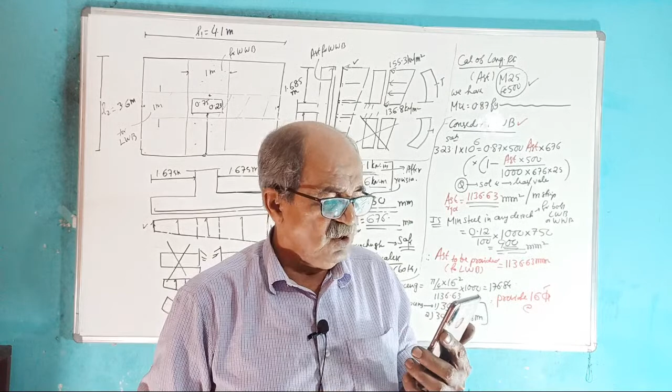Video is okay, we shall continue. See, these decorations all I am not bothered about. The decoration part, people want systematically, but subject should be systematic, not other unnecessary things.

Again remember, I will tell you what happened. What happened is the usual problem. Because of some, see, usually I always check.

Today in the beginning, you wasted a lot of time for not giving values, I forgot it. Otherwise usually after 5 minutes I just go around and check the charging. Today I forgot to check the charging. Charging went off, that's all.

Charging problem. I told you always in the beginning of the class, just send one message to me. What? Charging sufficient, recording is not there. If it is a YouTube class, automatic recording, I don't have to record. In Zoom I told you, remind me charging and recording. In YouTube class, you just send one simple message.

See, someone told good evening there. Okay, good evening, thank you, good evening. But at least charging, at least charging, I will see it and check immediately. See, this is called unnecessary waste of time.

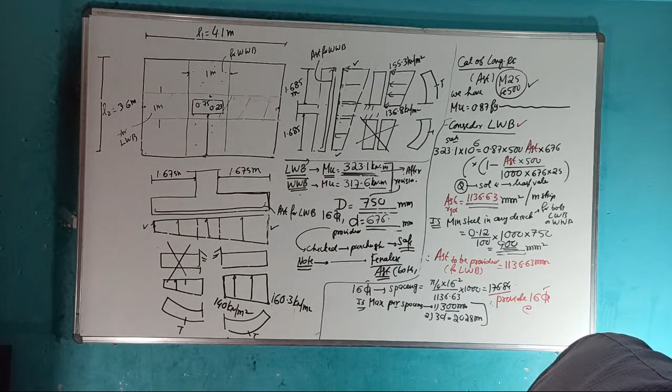See, now no disturbance. You will go for 16 torr at 175 center to center. Okay, that is 176.84, we will round up to 175.

This will complete. Therefore remember, later I will put this sketch once again, you don't write. So this AST for lengthwise bending is what? 16 torr at 175 millimeter center to center. Correct? Clear now? AST provided for lengthwise bending is 16 torr at 175.

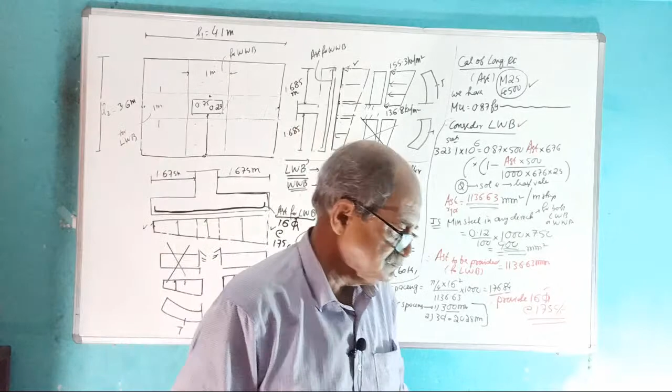We will change it later, no problem. Clear now? 16 torr at 175. Clear or not? That is AST for lengthwise bending.

Fast, okay. Now see, I am changing here. Consider widthwise bending, start once again from here. Bending moment is how much?

317.6. Okay, then equal to, same formula, tell me AST required first. Change AST, AST required first, instead of 323.1, now it is 317.6.

AST required, how much? AST required first. Solve the quadratic equation, get AST required. We should finish this question today.

Otherwise I thought I will tell one more information about the central band of rectangular footing. Okay, tomorrow I will tell it, tomorrow I will be very careful.

See, I prepared an extended class earlier only, but it takes at least 7-8 minutes for activating after charge is gone. This particular mobile takes at least 5-6 minutes, till that time it will not get on.

1116.96. So minimum remains same, so you have to provide 1116.96 spacing. How much spacing?

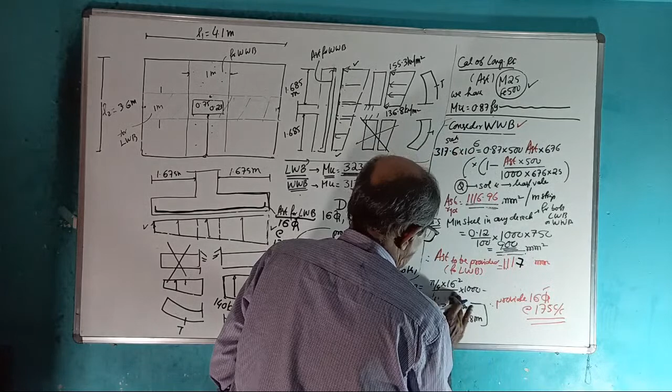Spacing for 1116.96, okay, 1117. Okay, why Chaukasi? Take 1117. Okay, now tell me, for 1117, spacing.

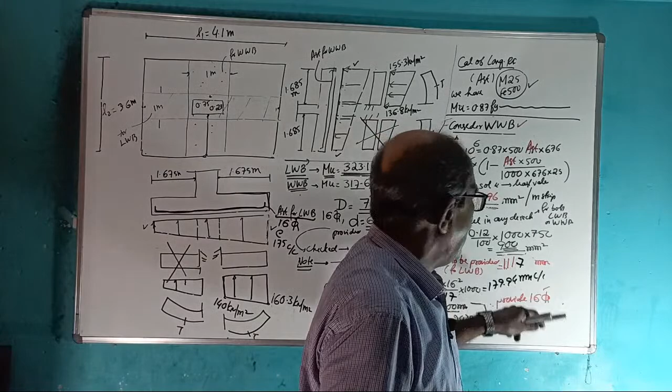See, when you calculate spacing from a strength point of view, someone will tell 179.94 is almost equal to 180. Or I will do one thing now - I will use the value. So I will make a small mistake here deliberately, so that I can show something.

179.94, you cannot make 180. You have to make what? You have to make 175. If you make 175, both will become same steel. Make a note - I do not want same steel for both. So, just for understanding purpose, I will make a deliberate mistake here.

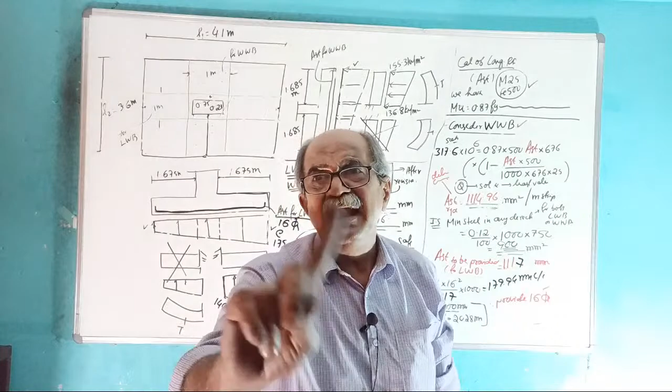Instead of 1116.96, I will make it 1114.96. You write here - deliberate calculation mistake in the class, purposefully made. Practically don't do it. So I will change it deliberately to 1114.96. And now tell the answer.

1114.96 spacing - this is just to see that the two steels are different. That's all. Now spacing, how much? This is a deliberate mistake, done just to see that two steels are different. 180.23. Therefore, now you can provide 16 torr at 180 mm center to center.

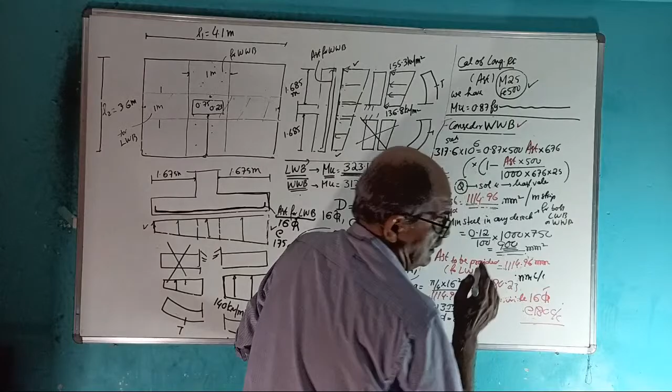Clear? Somebody will tell, someone will comment - you can't take less, I am taking deliberately. Don't take practically. Therefore, this steel equal to 16 torr at 180 center to center. Fully clear? Therefore remember, lengthwise bending steel is 16 torr at 175. Widthwise bending steel is 16 torr at 180.

And later I will change it. Fully clear? Full clear or not? Lengthwise bending, widthwise bending, both steel. Okay, now the most important part - I will rub everything now. Now we are going to the most important part. See, I will remove everything now.

This also I will remove. This also I will remove. See, now one heading you are writing. Now, check for shear. Remember, check for shear means which shear? One-way shear, not punching shear. One-way shear, or some people call it wide beam shear.

Wide beam shear, some people call it, or it is a shear which causes diagonal tension. See, which will create a tension crack this way - diagonal tension crack. Somebody will ask, sir, how does shear produce a diagonal tension crack?

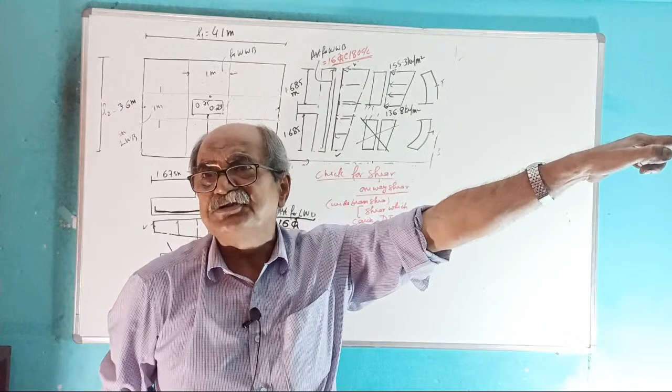Go back to strength of materials, it is discussed there. But for those in the RCC batch and also the ETABS batch, I told this earlier during beams, yes or no? Those in the RCC batch and also in the ETABS batch, long back in shear, I told this diagonal tension concept - tell me yes or no? Those who are in the respective batches, I told it there. General public, if you are viewing only from YouTube, just believe me, that's all. I cannot, for your sake, leave the subject and go into complementary shear.

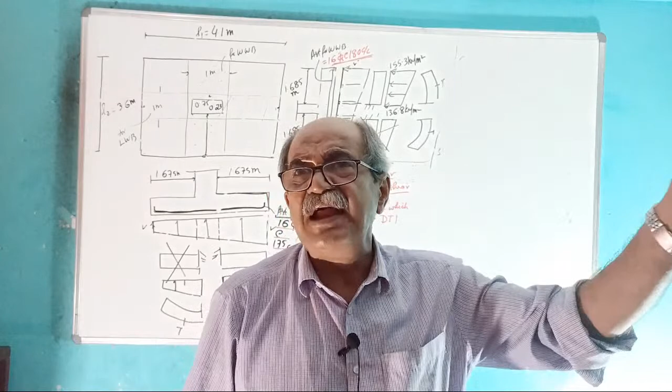Okay, start. Now remember, you can call this simple language our usual shear. Some will ask, what is usual shear? I will tell them - it is between me and my students. Don't interfere. If you are my student, don't question me. That's all. Okay start, tell fast.

Critical section - remember, make a note. Section for this shear is to be considered at what distance from face of the column? First, critical section for this shear - crack will run at 45 degrees. That was punching shear. Punching shear critical section is at D/2 from face of column.

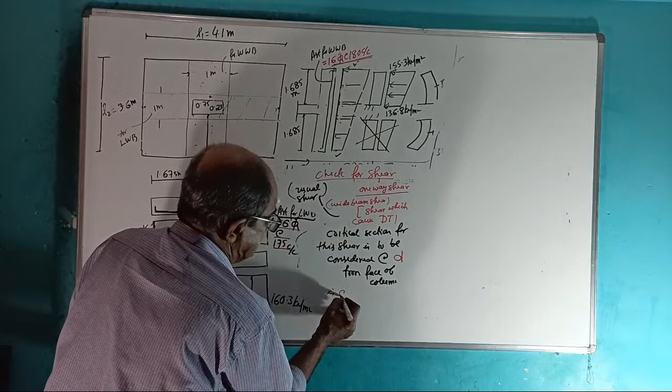For this shear, critical distance is at D, not D/2. That is at how much? D how much - oh, forgot. Tell me D value, I forgot the D value, everybody. Remember, D equal to how much? Forgot the answer - 676 millimeter.

676 millimeter, okay. That is at what distance? That is at 676 meter, 0.676 meter, from face of column. Remember, D is 676 millimeter. Why meter? Because when you are considering shearing force, we are referring to this diagram, and we want the dimension in meter.

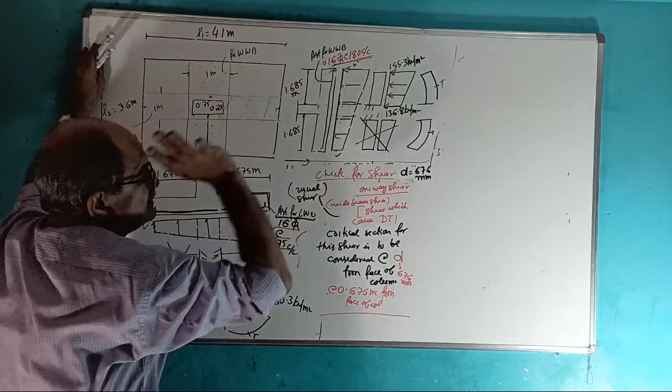Okay, now do one thing - start. Now, for all those who want to thoroughly understand, once again write this sketch. Once again write this sketch, once again write this sketch. See, good for health - write all these sketches once again. Then note, write all the sketches. Remember, once you get control, this sketch is already there, so you can use the same sketch and mark it with a dotted line. But this time, for thorough understanding, to make it completely independent, write all the sketches once again.

Then, first consider lengthwise bending. Okay, when you take lengthwise bending, what do you do? Mark critical section - see, mark critical section. Start. See here, from the face, this side - which side is critical? See, it will be somewhere here.

Now, 1.675 — I will push that side. Go that side. 1.675, I will push that side.

See, from here, this is the critical section for shear. From here to here is D, equal to 0.676 meter. Therefore, anybody can tell me what is this distance first.

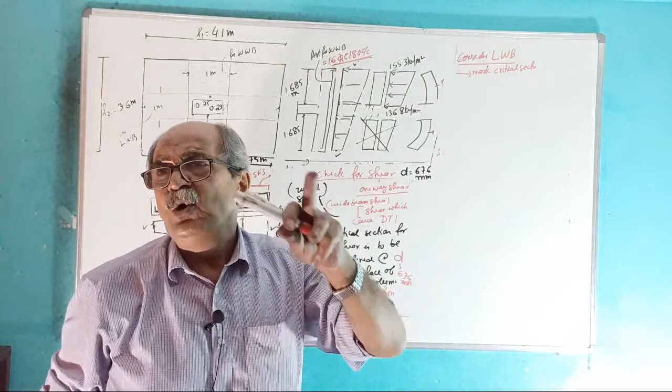This is 1.675. Tell me what is this distance. Why? For finding shearing force for a cantilever, I told you, you have to look at the free end side. Someone can tell me, I will look at the fixed end side instead. If you look at the fixed end side, you require a reaction which is only due to a 1 meter strip. Can you calculate that?

I don't know. Then keep quiet and look at the free end side. When I tell you something, follow my statements. Don't try to advise me something else. It is beyond your capacity to advise. Answer.

1.675 minus 0.676 equals 0.999. Thank you. 0.999 meter, almost 1 meter. No, let it be 0.999.

Now I want the shearing force here. Look at this side. Look at this side. This I repeatedly told you — cantilever. Either you believe me, if you have not come to any of my other classes, or if you came to my other classes, I told it so many times.

Start. Now I need this ordinate. So by interpolation, tell me — this is not required. I want this ordinate. Tell the answer. This is 160.3, this is 140, for a length of 1.675 meter.

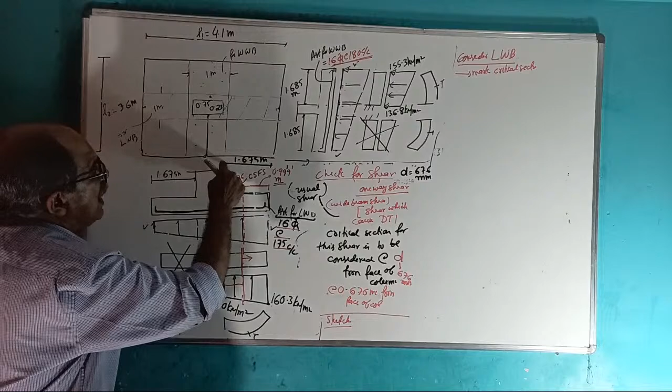From here, you go by 0.676. Then it will be more than 140, less than 160. Tell me this value by interpolation first. By interpolation, tell me that value. If interpolation is not clear, I told you earlier what to do.

You are forcing me to calculate, see. Is it 148 point... first decimal 2, kilonewton per meter square, correct? This ordinate is 148.2 kilonewton per meter square, correct or not?

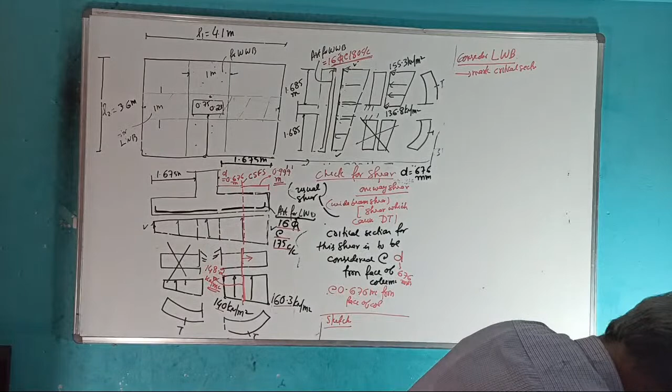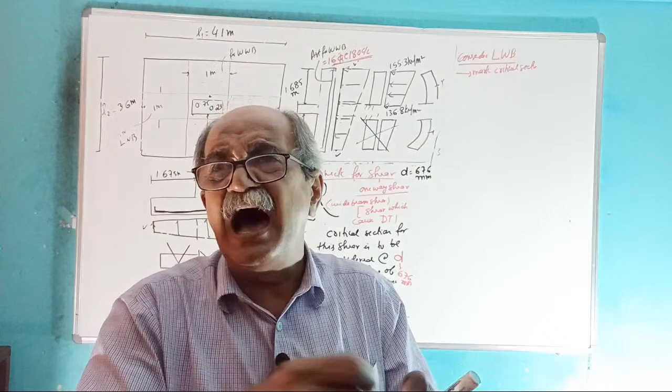Tell me first, I will check the charge once again. I do not want the charge to drop once again. Oh, it is charging, okay, it is charging. But actually the charge is very low, because if you take a live class, more battery is consumed. Usually I put it on full charge so that even when the class is running, the charge remains the same. But today we don't know — the charge is increasing slowly, why? How much is it charged? 90% is used for the live class.

Correct, okay. Now calculate the shear force at the critical section. Critical section — see, that is called V. I told you so many times, I think only one example I have given you.

If you want shear force, look at the free end side — only this much load. When the loading is trapezoidal, trapezium variation, or UVL, total load equals area. When you want bending moment, what did you do? You multiplied total load by distance. Now we want only the load right there. This also I explained in an earlier class — only load means only area. How much?

148.2 plus 160.3, divided by 2, into 0.999. This will give the shear force in kilonewton. Answer: sum of the two parallel sides divided by 2, into that distance, will give the shear force.

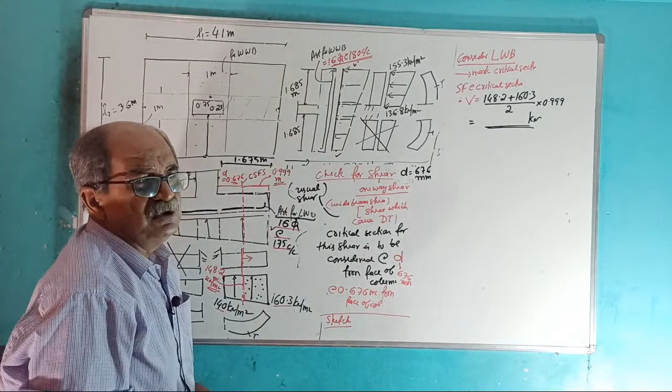How much, shear force? This point was explained earlier before starting this question. If you go through that, and if I don't have to tell all this again and again, this footing class would be over in one hour. That's what — so many places I have seen footing design uploaded in 30 minutes duration. What they tell, what you understand, I don't know. What you tell, what you understand, I can't make out. They'll just keep on telling.

154.1 kilonewton, okay. 154.1 kilonewton — that is the shear force.

Okay, start. Now calculate what is the shear stress developed due to shear force. Symbol is tau V. Remember, this is not punching, this is usual shear.

Tau V equals V by BD. Answer: shear force is 154.1 into 10 to the power 3, divided by B is 1000, divided by D is 676. Tell the answer in Newton per mm square. Fast, fast.

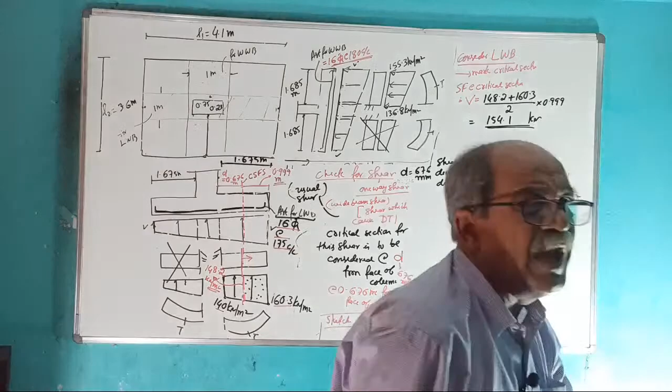Someone is suggesting something to me. What? Sir, VU, sir? Yes, I know it. This mistake you are doing earlier, I wanted to trap you. I told you — this is the shear force due to what load? Tell me. This is shear force due to the pressure, and the pressure was due to service load. So this is the shear force due to what? Tell me, that is the shear force due to what load?

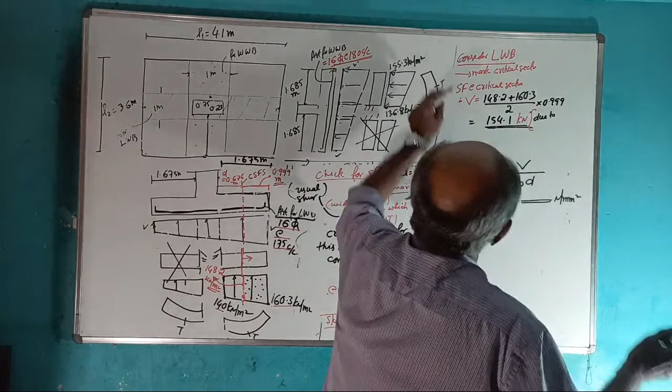See, somebody calculated — see, you should not have calculated, wrong. This is the shear force due to what load? That 154.1 is the shear force due to what load? This mistake I told you is a criminal mistake — it is due to working load. Therefore, you require factored shear force. See, I left a gap.

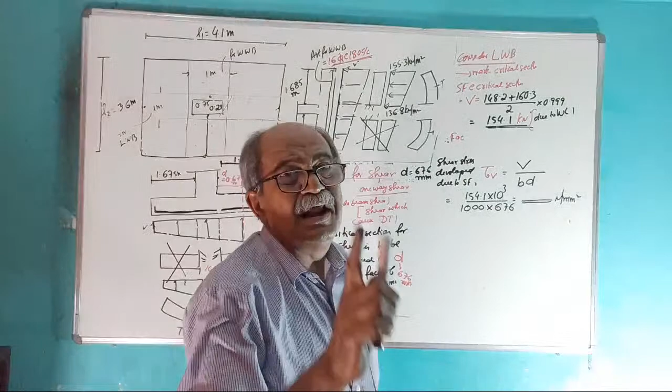You should never forget factoring. Did I tell this so many times or not? Whenever you calculate shear force, bending moment, axial force or twisting moment for working load, don't forget to factor it, you get the factored values. Or, factor the loads in the beginning itself in beams, then you get all the answers due to factored load only.

So, factored shear force, VU. See, I wrote deliberately V here. I was knowing, that's why I left the gap. Equal to how much?

154.1 into 1.5. Someone will tell it is not 1.5. For some combination it is different. Keep quiet, I will tell them, don't interfere. Do you think I am not knowing? In the demonstration class, it is 1.5. If you take other combination, finally there also it becomes almost 1.5 only.

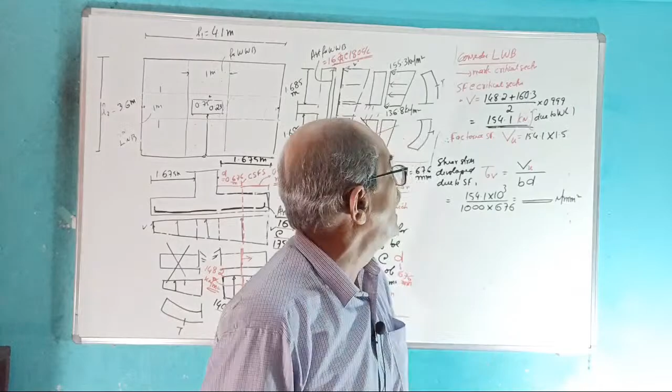Oh, I was not knowing. You are not knowing, then how dare you comment? I will tell that way. You comment only if you know the basic concept. Answer. Don't forget, this is called criminal mistake.

Yes, how much? 231.15 kilonewton. Therefore, VU is 231.15 into 10 to the power 3 divided by BD. Tell the answer. See, if you increase the depth by around 75% to 80%, punching comes safe, and usually this also comes safe. But if you don't increase, punching is unsafe, and this also will come unsafe.

0.34119 is 0.341. Remember, 0.341 Newton per mm square. Now to get what? To get tau C. Tau C means allowed shear stress. Remember, tau V is danger, tau C is welcome. To get tau C, use IS code table number 19.

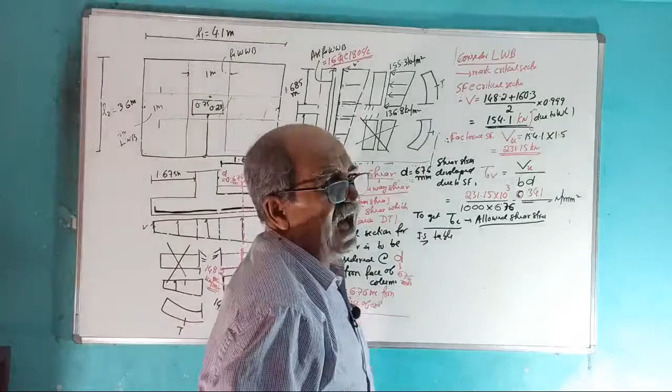After taking classes for not 19 years but 38 years, even now I get confused about the table number. Some student will ask me, sir, table number, page number. I will tell within no time. Yes, correct, principle... sorry sir, that is for you, by-hearting is for me. Is it table 19? I think table 19, most probably. Yes, thank you.

Table 19. See, M25 concrete we are using. Now, first you calculate M25 later. If you want tau C, first you calculate PT provided. PT provided is 100 into AST provided divided by BD.

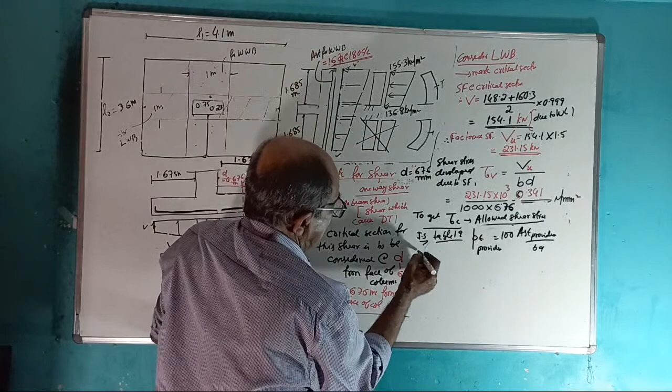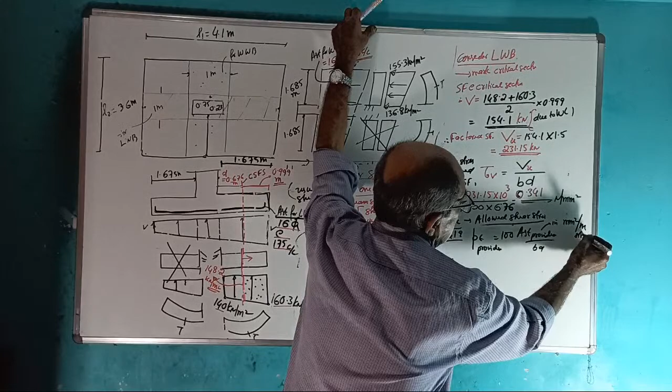Remember, now important, see, AST provided for lengthwise bending at present is how much? 16 phi at 175 millimeter center to center. First of all, I should not tell, this is spacing, but we want AST provided in mm square per meter strip. Therefore, to convert this spacing, if you know number of bars, you people know how to find AST provided.

When you know spacing, I told you, use the reverse formula. Remember, AST provided equal to, what is the formula? If you take reverse formula, it is width B divided by spacing provided, into cross-sectional area of 1 bar. If you want B, in the case of beams, steel provided equal to area of 1 bar into number of bars. But when you define spacing, then you have to use reverse calculation.

This also I wasted time. Why? Already told, that is my nature, what to do. AST provided equal to width B is 1000, spacing provided is 180... lengthwise bending is 175, into pi by 4 of 16 square will give AST provided in mm square for 1 meter strip. Answer. This will tell you what is the AST provided.

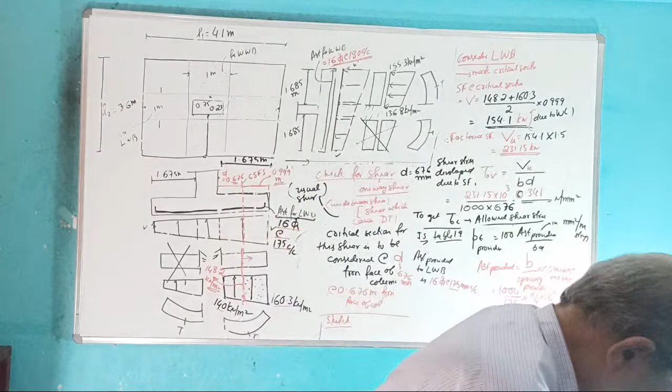It will be slightly more than AST required. See, the required AST was 1119 something. This will come slightly more. Why? Their spacing came 176, we reduced the spacing to 175. When you reduce the spacing slightly, steel provided becomes slightly more. Answer: steel provided becomes slightly more. Instead, now it comes to 1148.34. Okay, thank you.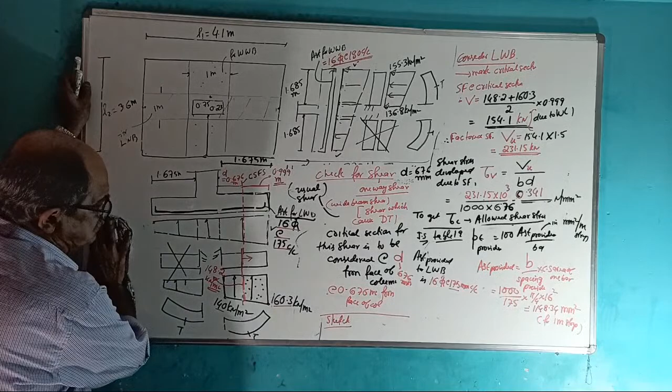1148.34. Okay, now some space required, I will remove the space here. Why? This is not required now. See, now this is not required, I will rub this one. That I am not removing, I will rub this one to continue.

Okay, start. Now go to IS code table number 19 for M25 concrete. M25 concrete. Tell the answer. You know PT, you know tau C. I'll put the space problem here. You know PT, you know tau C in Newton per mm square.

See, your PT came to... oh, we are not done PT. Calculate, therefore PT, you forgot. PT equal to how much? I forgot to calculate PT here. 100 into AST provided, I've written. AST provided is 1148.34 divided by 1000 into 676.

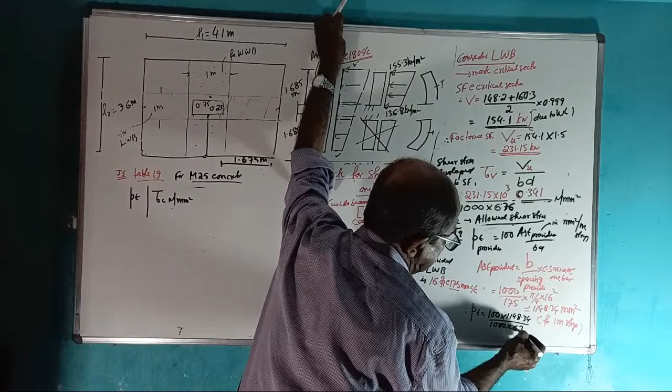What is PT? Tell me. PT equals 100 into AST, provided by BD, will give PT.

0.1608, okay 0.1608. Start.

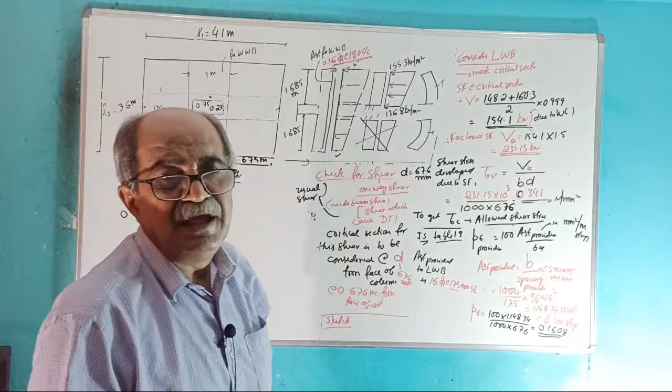IS code says if PT is 0.15, tell me the answer. If PT is 0.15 for M25 concrete, what is tau C? Table number 25, table number 19. For PT equal to 0.15, what is tau C?

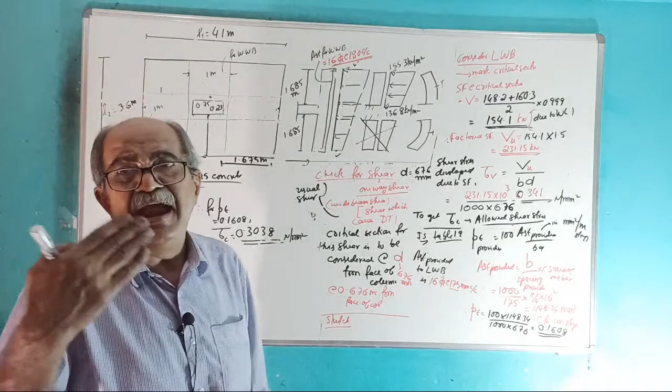Correct. Whereas we got tau, this is tau V. Tau V means, see, tau V is danger, or it is like your bill. If you go to a hotel and happily eat, how much bill comes, that is tau V. Whereas tau C is the allowed shear stress, the allowed shear stress. This is like how much money is in the pocket, how much money in pocket.

Remember, tau V is danger, tau C is good. Why? More money in the pocket. Tau C you got how much? 0.3038. Therefore your tau V is more than tau C.

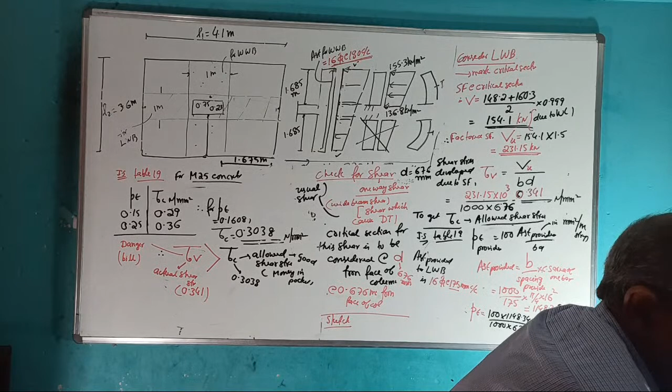Therefore tell me, safe or unsafe? Your tau V came more than tau C. Good news or bad news? Tell me, bill came more than the money in the pocket. Good news or bad news?

Tell the answer. You happily spent in a hotel, eating everything. Finally the bill came, like how much? Bill came 3,410 rupees. When you count the money in the pocket, you have only 3,038 rupees. Good news or bad news? Bad news, why? Bill came more.

They will tell, go to the kitchen and grind the rice, in olden days. Nowadays they will tell, sir, card is there.

Okay, so tau V is more than tau C, therefore not safe. Remember, make a note: punching shear first drastically came unsafe. Then we increased the depth. Actually we almost doubled the depth from the beginning. Even then, punching shear escaped. This gave trouble, that shows that punching shear and this shear are both equally critical for the footing slab.

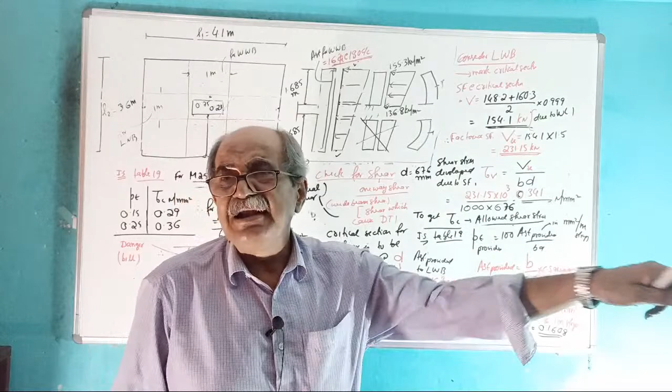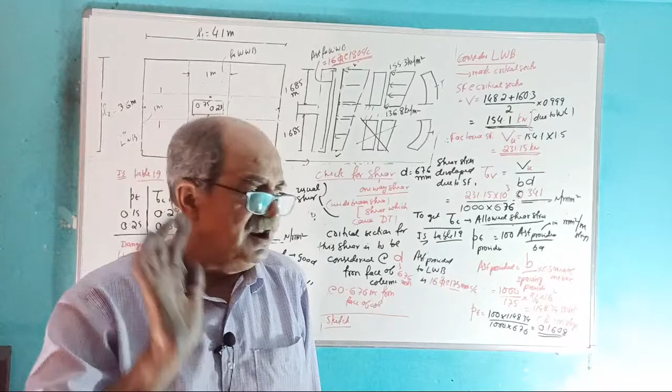If that comes safe, usually this will come safe. But one thing, now unsafe. Tell me, is it severe unsafe or marginal unsafe? Like, bill came 3,410 rupees, you have 3,038 rupees. Will there be a severe fight or is some adjustment possible? Tell that, or you tell in numbers: bill came 341 rupees.

You have only 304 rupees. Will it be a very serious matter? Will he shout at you and create a scene, or is some settlement possible? Tell me, it is a marginal unsafe case, some settlement possible.

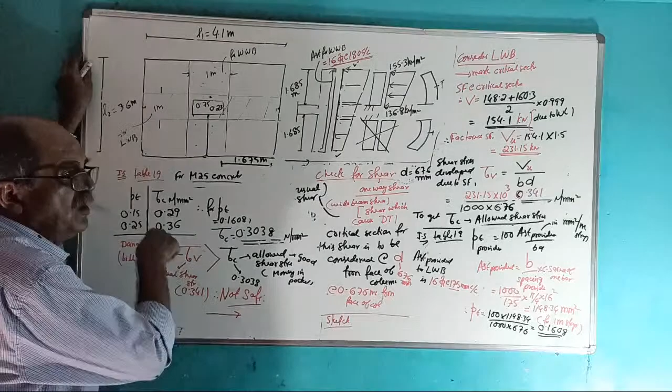I told you, if tau v is very high compared to tau c, if it is severe unsafe, you cannot go for adjustment. What do you have to go for? Make a note: this is marginal unsafe. If it is marginal unsafe, there is a solution - that is called adjustment.

Like in the hotel, suppose the bill came around, you took only one person, you go eat, bill comes to 320 rupees, suppose you have only 310 rupees. What will he do? He will tell you, sir, 15 rupees shortage, or 10-15 rupees shortage, please give it next time, or he may just let it go.

But if the bill is 400 rupees and you have 300 rupees, that's a little severe case, he will tell you, sir, when you eat you should know. Okay, then what to do? But if the bill comes to 600 rupees and you have only 300 rupees, he will not let you go. He will say, sorry, this is beyond the limit.

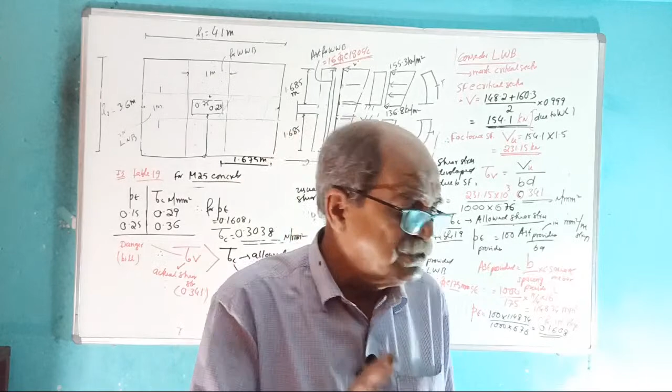Tell me what you have to do. If it is severe unsafe, then there is only one solution. Tell me, if it is severe unsafe, only one solution - I told you earlier, make a note. Severe unsafe means only solution: increase the depth and revise again.

But if it is marginal unsafe, a little adjustment is there. I told you, this is called artificial. See, it is marginally unsafe.

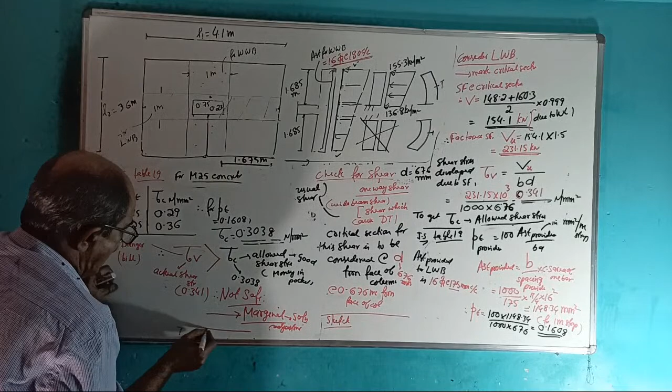So this sketch I am removing now. See, from here I am going upper side, I am removing this sketch now. It is not required for me now, that sketch is not required, so I can remove it, because I want everything on the board.

Okay, start, make a note. Not a very severe case.

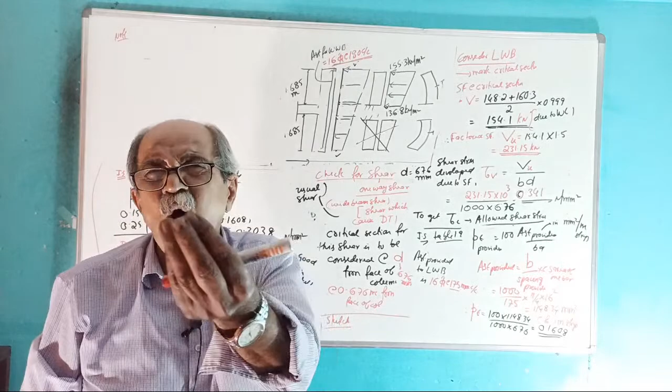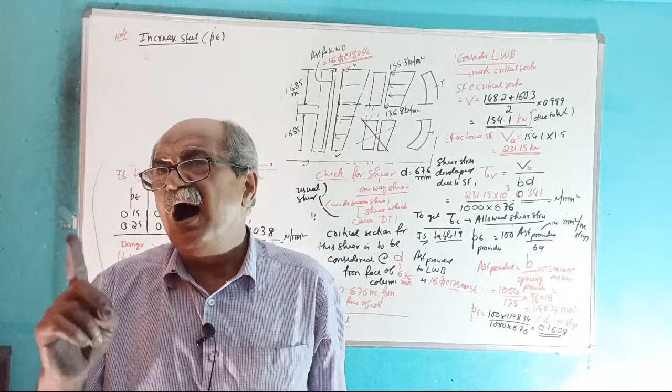Remember, increase steel, actually that is PT. When you increase the steel, remember it is artificial, not natural. In the deflection control I told you earlier, for a normal case, for marginal unsafe slabs, you can go to artificial, but remember, always natural is better than artificial. Increasing depth is natural, increasing steel is artificial.

Okay, done, increase steel. Now you have to go to reverse interpolation. Tell why - now find for what PT.

What tau c will - earlier tau c came 0.3038, shear stress came 0.341.

Tau c will increase to how much? Tell me.

Tau c from 0.3038, that is little money you adjust there - your friend, even give 10 rupees, somebody else, give 10 rupees, that way.

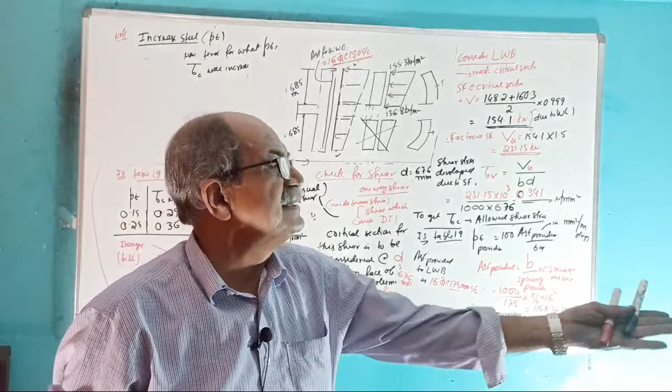You see that your tau c will increase from 0.3038 to what value? This also I told you earlier. First of all, I need not tell this one today, but I want this question to be a perfect question. Increases to what value? Tell me.

How much, tell me. No, decrease spacing is okay, agreed, but first you tell me - I told increase, what is this? Increase the steel only, I have not written increase spacing.

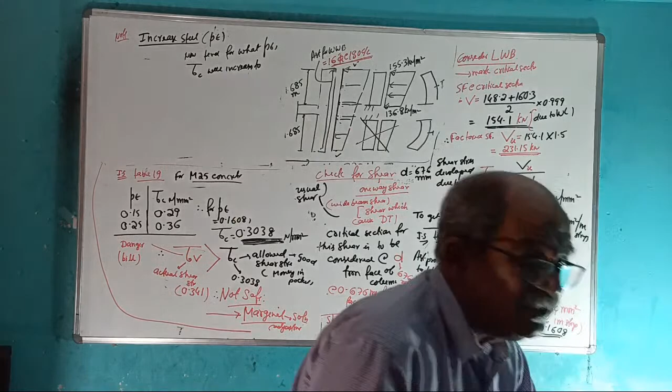Oh, you are advising me? Can you advise me? First of all, tell me, can anybody advise me on a technical matter? Anybody got the courage to advise me? Is it possible? I told you increase steel - I know increasing steel means decreasing spacing. Do you think I am that weak? I am not that foolish, you know. I am not that foolish. Okay, leave it.

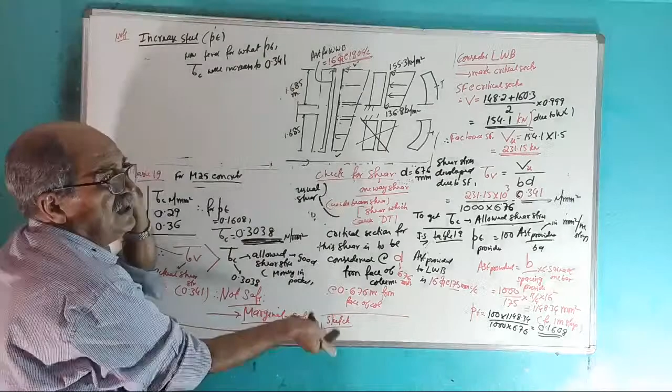See, now write here, write it this way. Tau C equal to 0.29 for PT equal to 0.15, and tau C equal to 0.36 for PT equal to 0.25.

Therefore, for tau C to increase to 0.341 Newton per mm square, tell what is the PT required. Interpolate this way - actually you can do it here only, or you reverse it and interpolate.

Now some will tell, sometimes it happens, they will say sir, this way I know interpolation, this way I cannot do. Okay, then interchange and do it. Yes, or you stand here and do it.

Answer, PT. Now you should give PT more than 0.1608, up to 0.2367. Thank you.

0.2367. That is what? This PT equal to 100 AST by BD. Therefore, revised AST, new AST required to control the shear is 0.2367 into B 1000 into D 646 divided by 100. Tell the answer.

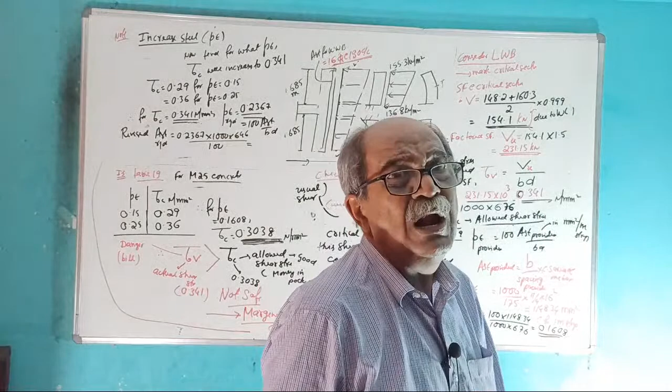Revised AST required. Last time required steel was 1119 point something. Now it will come more.

Bega, bega, today only required. Approaching 9:30, fast.

See, two reasons, so partially you should be blamed. When I started the class, actually I came 10 minutes late because some problem was there. Then when I started the class, you did not respond with the values. Second was actually my mistake of not checking the charge. But you are also responsible. I told you in my class, if you feel I am a commercial oriented lecturer taking classes for money matter, I will tell frankly, then you don't tell anything. But nobody who knows me will tell that way. So that's why I tell, at least some contribution, you remind me in the beginning about charging, that's all.

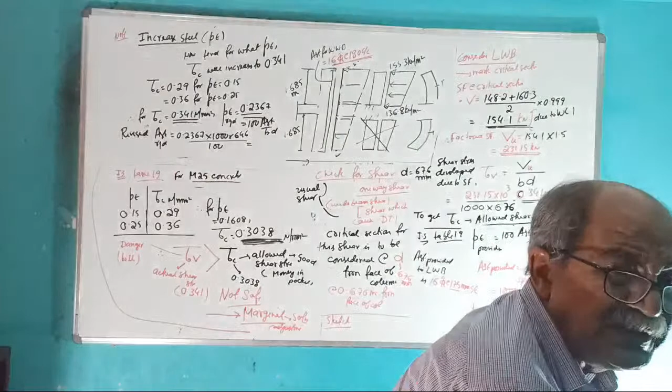Now, why stopped? AST fast. See, suddenly stop now, almost 2 minutes over, you are not telling AST. Now I have to calculate. You are forcing me to waste time.

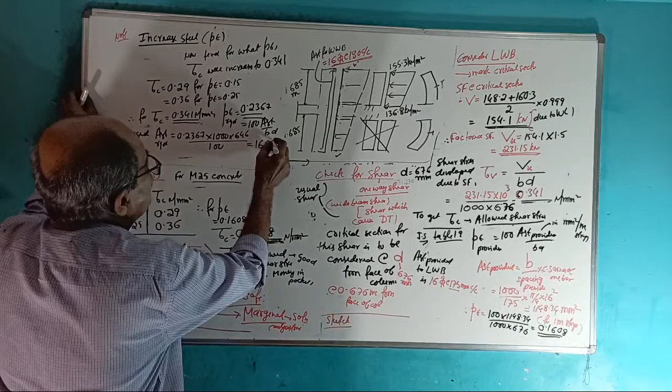67 into 1000, calculate now. 1660, 1660.09, okay, 1660.1 mm square. Okay, now even this sketch also I am removing.

See now, AST required. Now 1 minute. Therefore, for which spacing becomes what? Spacing becomes pi by 4 of 16 square divided by 1660.1 into 1000. Answer fast.

For which spacing becomes, I will put a line here to differentiate so that later I can check it. Tell the spacing, 1660 point something. I will use somewhere up to here. Spacing.

This much delay for spacing. It comes to 121.11, correct?

I think 121 I got in my calculator. How did you get 125? Pi by 4 of 16 square divided by 1660.1 into 1000, only 121 comes. How did you get 125? Which calculator are you using? Any outside made calculator where they don't know how to operate, produce the calculator?

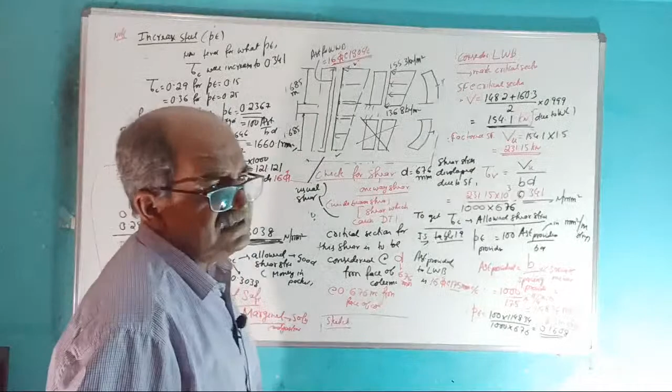121.121, or provide how much? Tell me. Now see, spacing came lesser, earlier it was 175. Provide 16 torr at round off. 121 came, this is good spacing.

You don't go to 12 torr. 16 torr at how much spacing? Time over. 16 torr at 120 center to center. Okay, 120 millimeter center to center.

Over. Now check for shear for lengthwise bending, it is the same. Remember now, I will fast finish for widthwise bending.

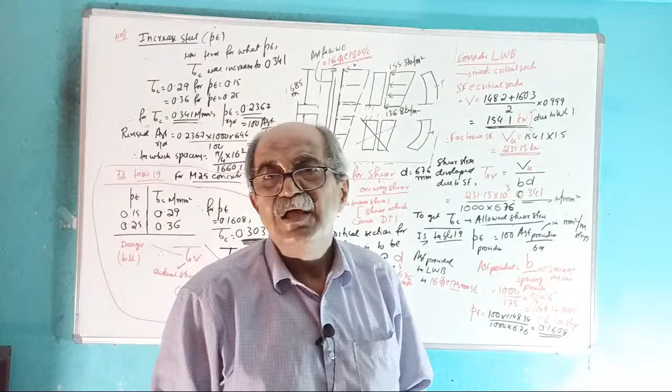Can you do it yourself only? Tell me, can you do it yourself only? Tell fast. If you can do it yourself, already 9:30, I will leave it for you. You should give the answer next time. It will take 5 minutes. Can you do it yourself?

See, widthwise bending, critical section comes here, at distance D from here. This is the area. Same way, can you repeat for widthwise bending and tell me the answer in the next class?

So, or I will do one thing, I will take a photo and write it here. Next time you take a screenshot. Okay, next time you take a screenshot, so I will take a screenshot of this one. Next time is tomorrow only. Tomorrow only, tomorrow only. I will do one thing.

I will write here widthwise bending. See, this sketch I will not write once again. See now, tell me fast answer. D equal to, fast at least. This is D, D equal to 0.694.

Then tell me what is this length. Fast tell me, what is this length? 1.685 minus 0.694, tell fast. Answer. You check for, consider what?

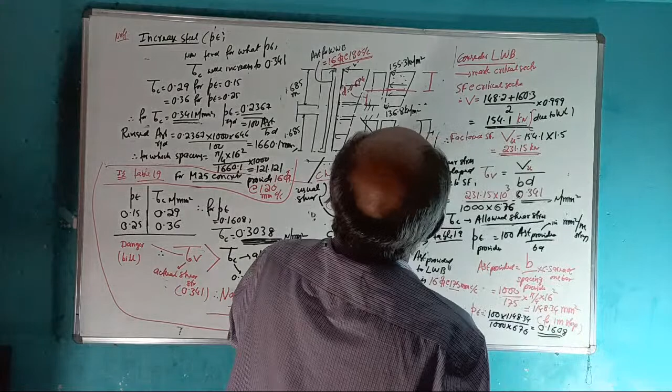Consider widthwise bending. 0.991. Okay, this is 0.991.

Or I'll do one thing, shall I finish fast in 10 minutes, 5 minutes? Tell me, shall I finish fast in 10 minutes? Who will take it tomorrow? Shall I fast finish in 10 minutes, 5-6 minutes? Who will take it tomorrow now? Better finish today only, okay, start.

Shear force equal to, see now, start. Now this value required by interpolation, this time I will not ask you, because I want to finish the question first.

That value is 144.4 by interpolation. Now shear force, look this side.

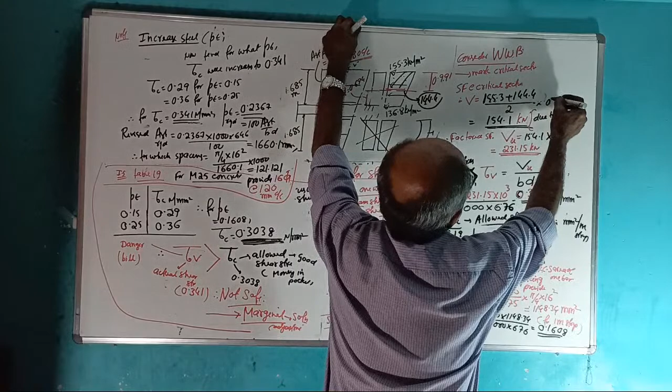It is 155.3 plus 144.4 divided by 2 into 0.991 will give you shear force. I only will do it. Why? Today only I want to finish the question.

148.5. Factored shear force is 148.5 into 1.5 is 222.75.

222.75 kilonewton. So this is 222.75 into 10 to the power 3 by same number, 0.329, it is 0.3295. Okay, allowed shear stress tau.

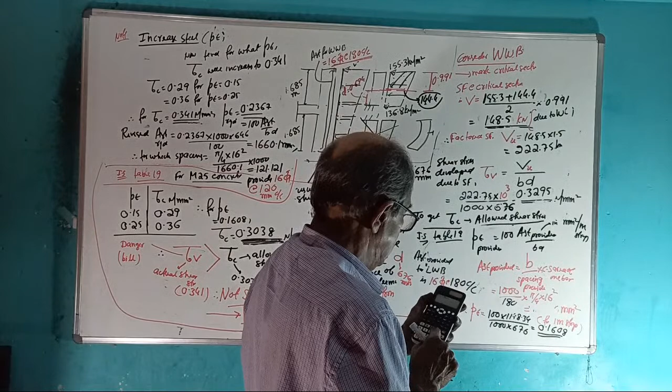Steel provided is 16 torr at 180 center to center. Remember, widthwise bending steel is 16 torr at 180. So divide by 180, it will give area of steel equal to 1000 divided by 180 into pi by 4 of 256.

1117.0 mm square. Therefore PT equal to 1117 by this number: 1117 into 100 divided by 1000 divided by 676, giving 0.165.

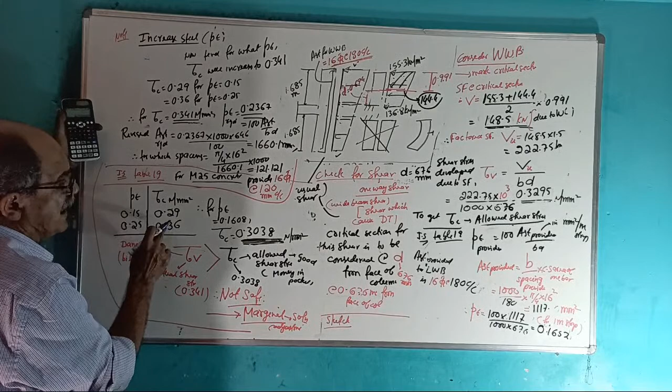0.1652. Now come back here. For 0.15 it is 0.29, for 0.25 it is 0.36. Come back here. For 0.1652 by interpolation, you get

0.3006. Therefore here also tau V is 0.3295, allowed is only 0.3006. Here also not safe, marginal.

Therefore increase steel. For which one? For widthwise bending. If you reverse it now, to get tau C equal to how much answer you want? We want tau C equal to, see, actual stress is 0.3295. Allowed is only this much. We want allowed to reach this number.

So for tau C equal to 0.3295, your PT required is, I will do it. Why? I am not that bad at interpolation.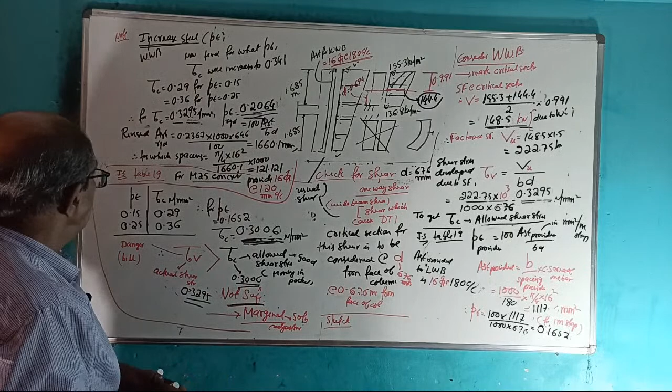0.3295, then minus 0.15, that is 0.2064. Hope it is correct. Correct answer? 0.2064. Correct? Instead of PT, 0.2064.

Is it correct? Okay, if it is 0.2064, required for widthwise bending is 0.2064. Now you should work out 0.2064 into 1000 into 646 divided by 100 will give you

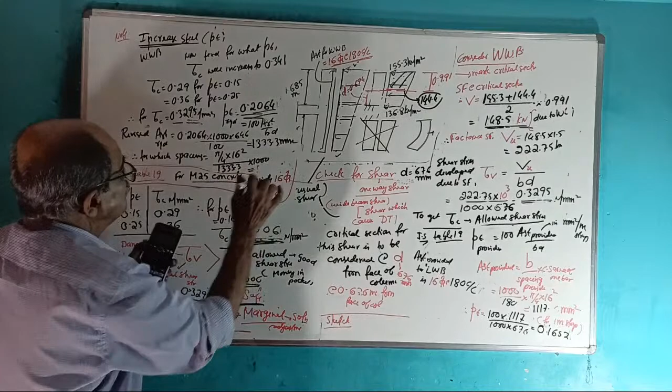1333.3 mm square. For that one, spacing will become 1333.3, 1000 will become reciprocal into 201 into 1000, giving 150.7 millimeter center to center.

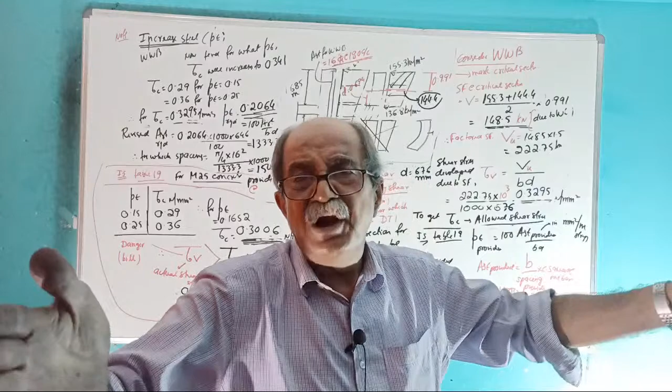So can you tell me, provide 16 tor at what spacing for widthwise bending? Last time you gave 180. That spacing is not sufficient, you have to reduce the spacing because we have to give more steel. Tell the answer, what spacing you can give? First, last answer from your side.

150.72 is the calculated value. Round it off. Nobody gives 150.72, the bar bender will start cursing. Bar bender will say, sir, where did you come from? What is this, sir, giving decimals of fraction of millimeter? Provide 150 center to center.

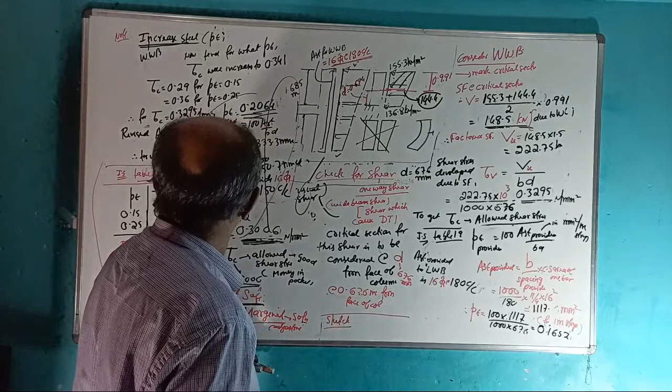Okay, therefore, closing part of today is that column is 230 by 750, footing lengthwise is 4.1, widthwise is 3.6, and footing slab is 750 mm. Lengthwise steel is 16 tor at 120 millimeter center to center.

Widthwise steel is little lesser steel, 16 tor at 150 millimeter center to center, because spacing is more. This is the final output.

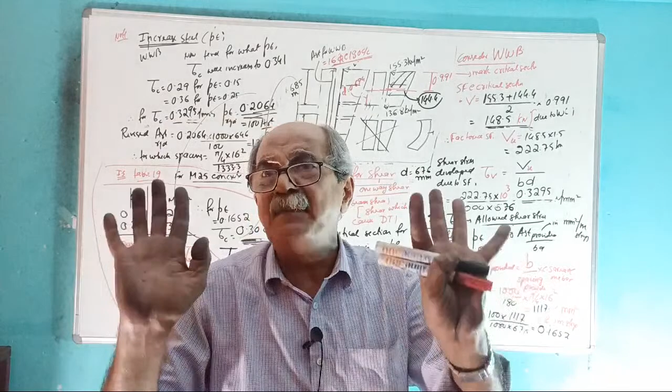When you go to ETABS & SAFE, nothing to be done. Prepare the model, this I am telling for ETABS people, 4.1 by 3.6 meter. Place the column, apply that load and couple. Then tell it the thickness you provide. See, run, it will tell everything. Only thing is, diagonal tension shear, it will not check. For that, use Excel sheet.

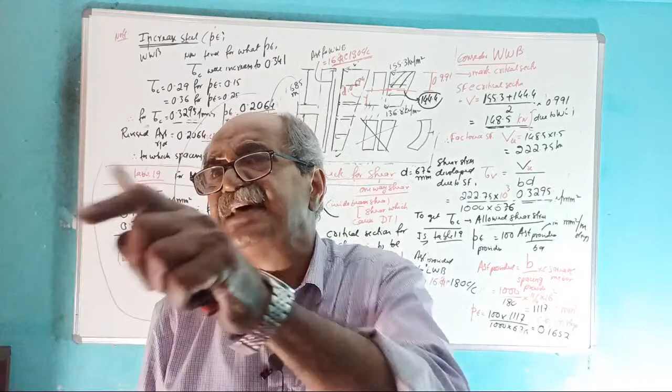I told you, oh sorry, forgotten. See, for checking shear, we have an Excel sheet. I suddenly forgot it. So do one thing, we prepared Excel sheet earlier, so those who prepared the Excel sheet, now check all these values using Excel sheet. Okay, done, can you do it? That Excel sheet, okay, here, okay, no problem.

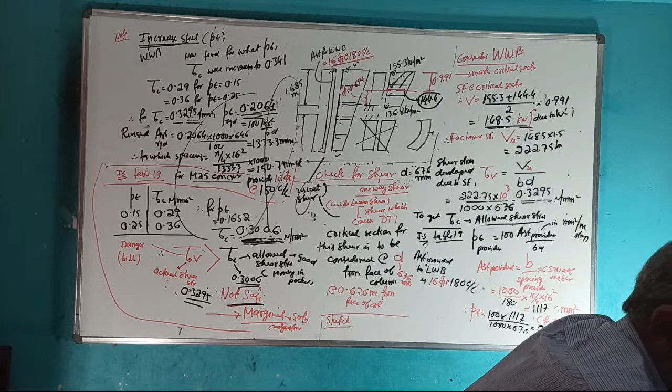This is manual design class, but in the ETABS & SAFE class I will tell you to use Excel. Agreed or not agreed? Agreed? In ETABS & SAFE class I will tell you to use Excel for all this. If you want the principle, refer to earlier class. Clear or not? Principle, refer to earlier class. In software class, no discussion of principle, there, principle of software, not the structural principles. You are not answering. Clear now? Their structural principle will not come, but even then, a little I may tell, not that I may not tell. So all the structural background is covered by me in the classes running now.